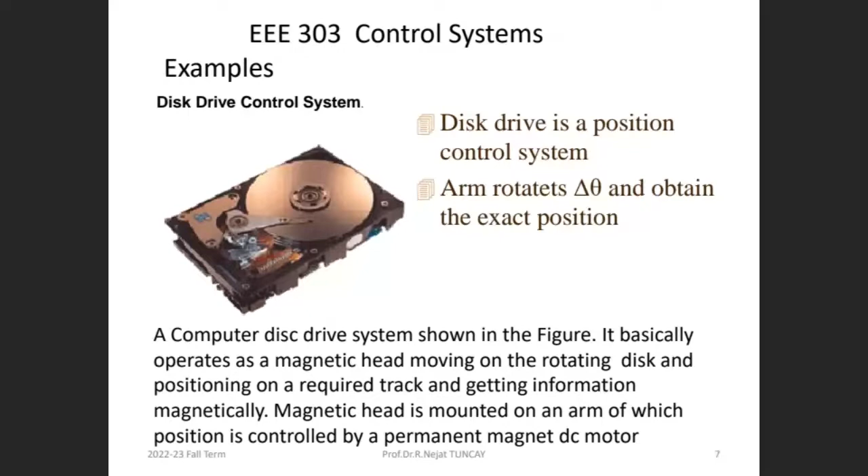So that was also another good example of the control system. For that case, it's a position control. Theta angle is controlled, so rotation angle is controlled. That's the example we talked. That is translational motion, so linear motion, in other words, is another type of action, and control the position of it.

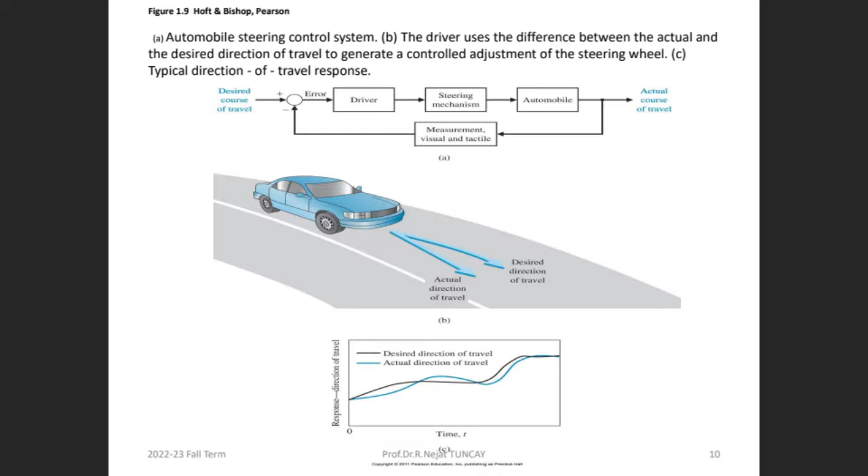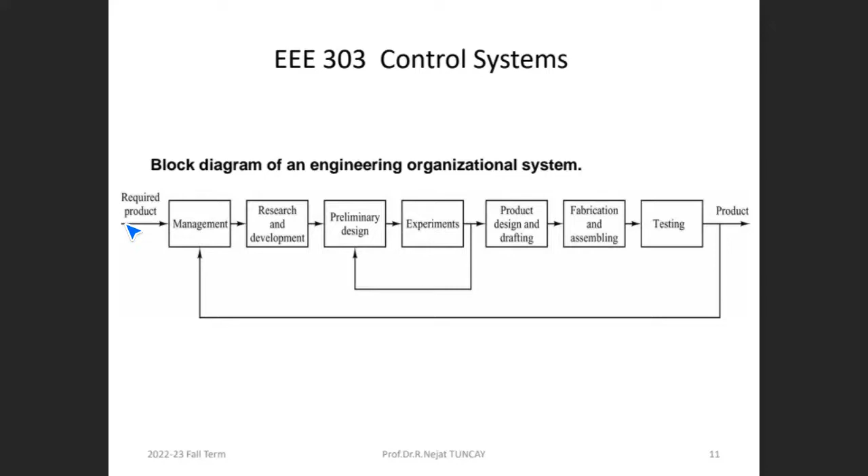Production system we discussed. That one is the first prototype in your lab. Then when you test those, you can see that there's a feedback here. And at the end, when you reach the product, you always compare it with the recent developments of the market demand. That is also another control problem. And we have also discussed the linear system and nonlinear systems.

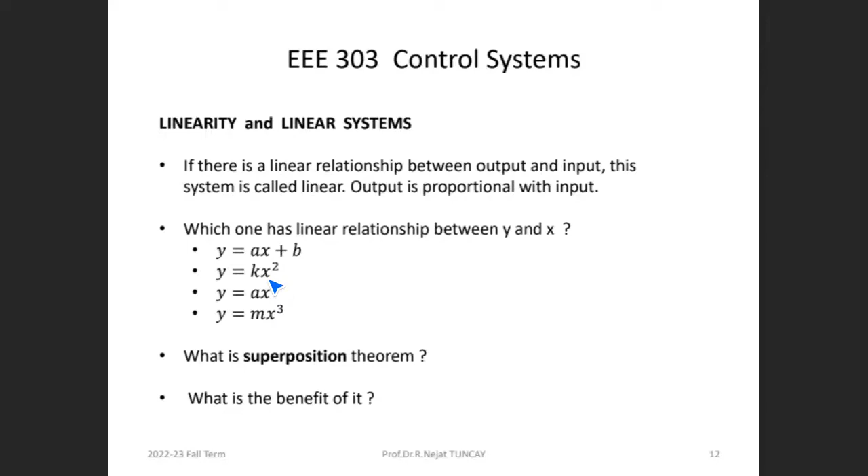We have seen that mathematically, the function which crosses zero with a constant slope, can you see that, is linear. That is a line, however it is not mathematically linear, since it's not crossing zero, okay? Although that one is crossing zero, it is nonlinear. And also that one is crossing zero, but it is nonlinear. Okay, so crossing zero is not enough, but necessary.

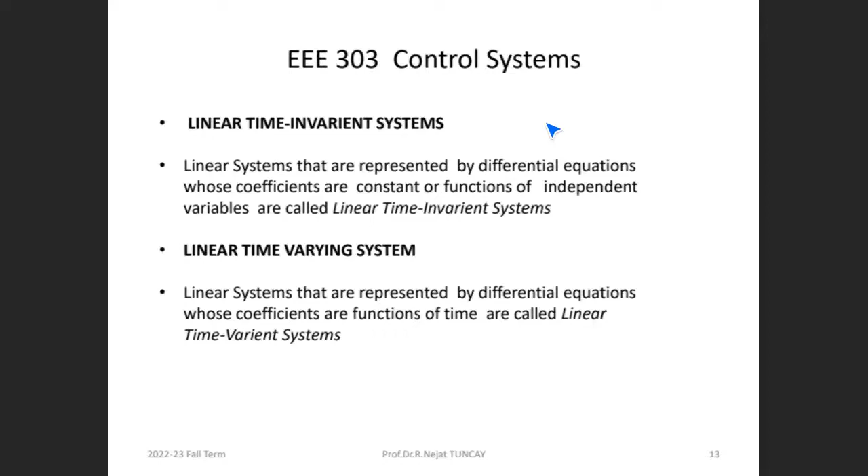Okay, and also linear time invariant. What is linear time invariant all about? What is linear time varying all about? I'm going to explain it to you. Okay, I will come back to linear time variant and time invariant systems later.

Bu önemli çocuklar. That's important. We have several types of inputs to our control system. One of them is a step. So you are actually producing a force which continues. However, if you give a pulse at an instant, that is an impulse function. That is not shown here. However, if your

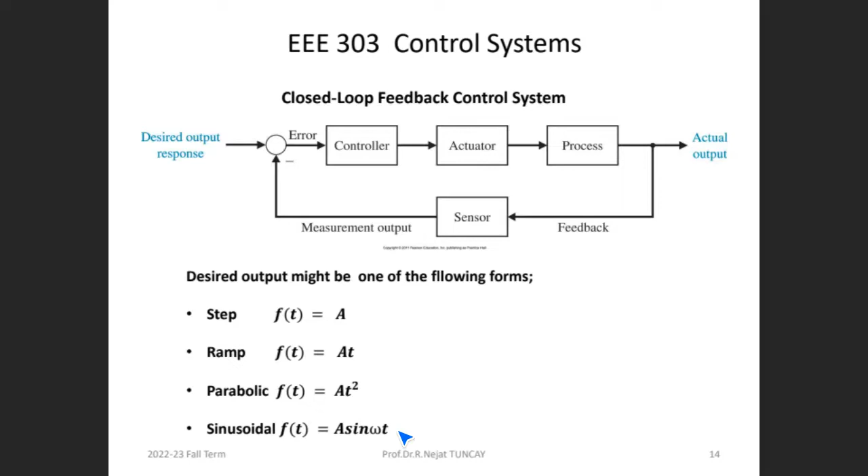force has got a slope with constant a and is a linear line, then it's a ramp function. Parabolic function is the square of this one, time, and also the sinusoidal function. Particularly you electric and mechatronics students might be able to see the sinusoidal response of your systems. So this is just revision of last week.

Inner loop, outer loop. There are two methods, transfer function approach and state space approach. We are going to use the transfer function approach. The transfer function approach uses S domain calculations. What's the practical point of the S domain?

We have only 6 students in our classroom. That means these students are keen to listen to the course early in the morning. They don't want to lose the time, or they don't want to lose some kind of teaching material.

So I hope you are going to answer this question. What is the benefit of S domain, or Laplace converted forms of the equations? What's the benefit? If you don't answer this question, that means you allow us to use Laplace to solve our problem. All right, but what is the benefit? Adil Bayraktar is saying that it helps us solve the problem. All right, how?

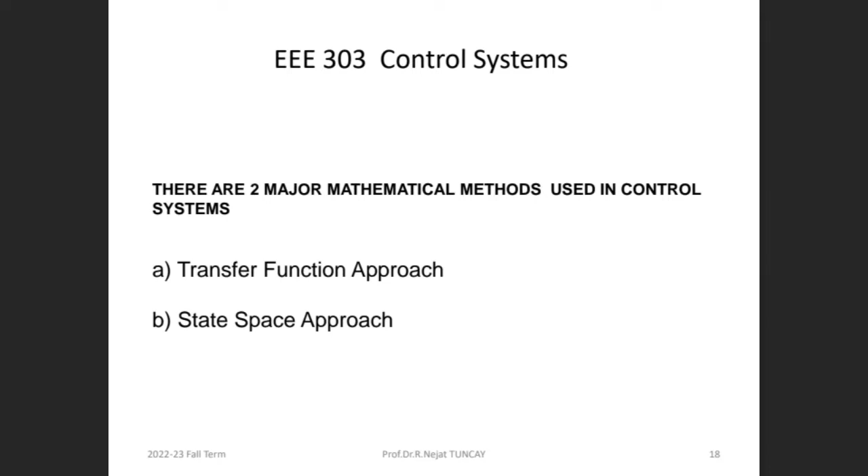Evet. To find the input, then doing the inverse. No, first of all, you couldn't catch my question. What is the benefit? Benefit means what's the advantage? The advantage: if you have derivatives in your differential equation, you convert it to Laplace and make it a linear algebraic equation, no derivatives. Then, of course, you are going to come back to time domain. S domain is the tool we use. Okay.

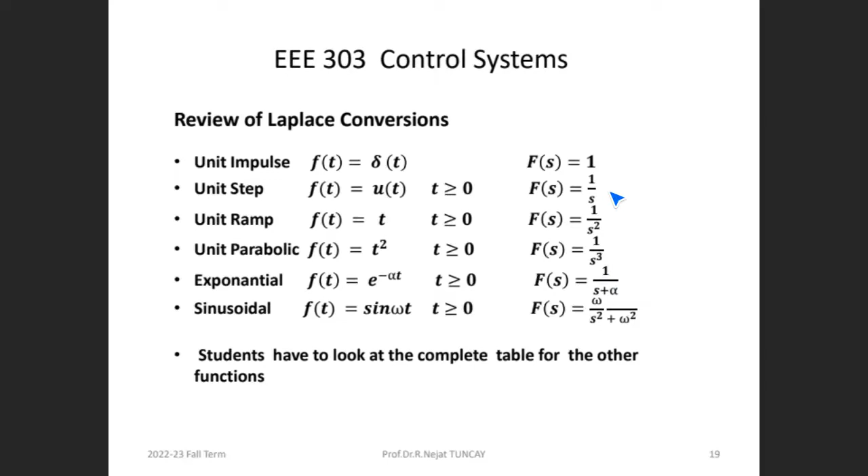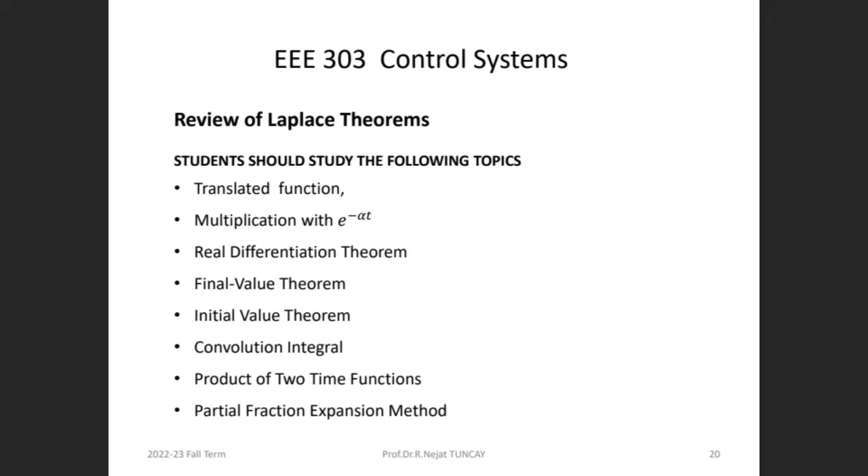All right. Final value theorem. The limit as time goes to infinity of the error is equal to the limit as s goes to 0 of s E(s). So in order to find the final value, which means ESS, the steady state value of the error. What's error? You remember that.

This is your control system. This is your input, R. This is your reality. And this one is plus, this one is minus. There's a system here, and that is the output. See, these are time functions, by the way. That is what a control system is all about. So that one is plus, that one is minus. So that one is E, error. E is error.

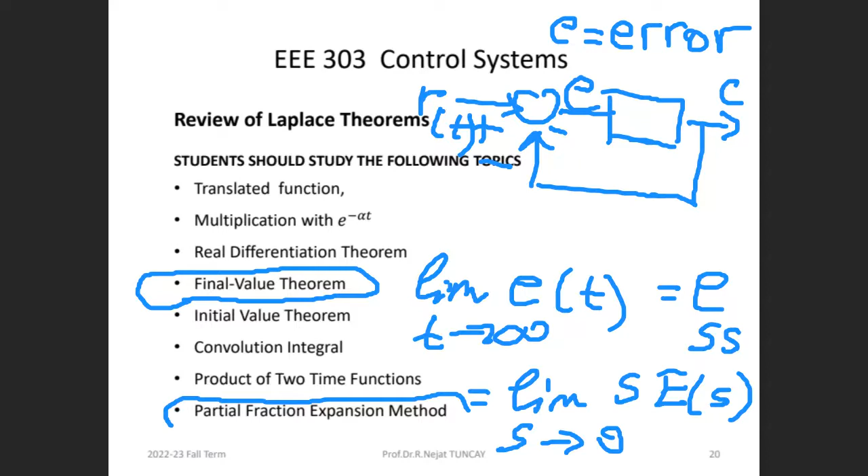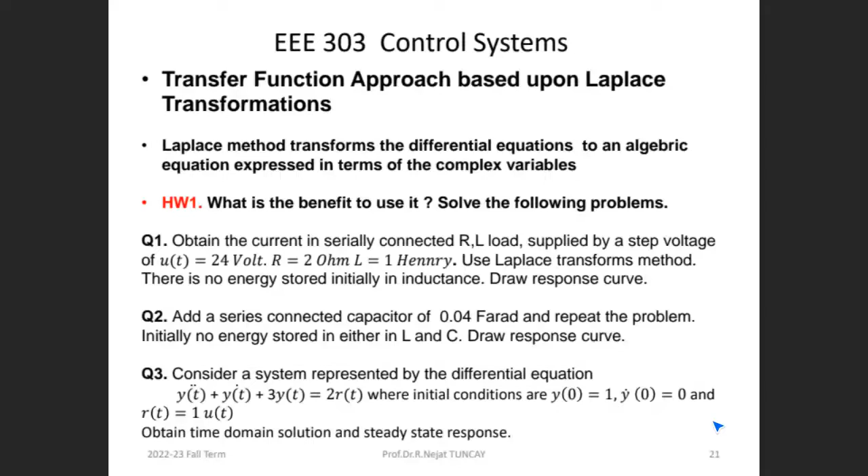I prepared those questions for you. It's not official homework, but you have to solve those. I'm going to solve this simple one later. So when you solve those and obtain the response, that means you start understanding at least the mathematics of it. So that's the end of last week.

You remember the superposition theorem we have discussed. If you have multiple inputs and the system is linear, then you can employ the superposition theorem. The superposition theorem tells you to solve it as if each input exists individually and the others equal 0.

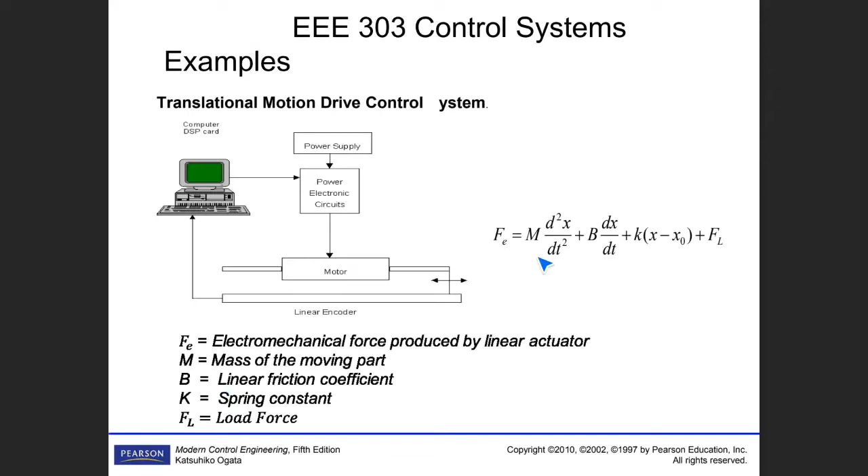I come back again. So you can see the rotary system is clearly similar. And for that one, that is mass. And also this is the friction coefficient. This is the spring constant, elasticity constant, and the load force. The electromechanical force is the one produced by the electric motor. The electric motor produces that force and overcomes all of them. Since there is a balance here, this part is the dynamics of the equation, and that might be steady state.

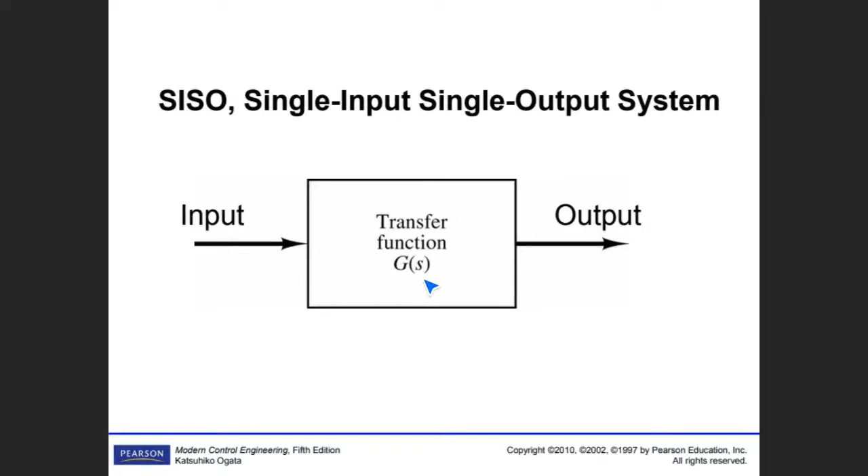Now, we are coming back to simple definitions. Single input, single output system. We have one input, one output. All right. And this you might call gain, or, if it's complex, a transfer function as well.

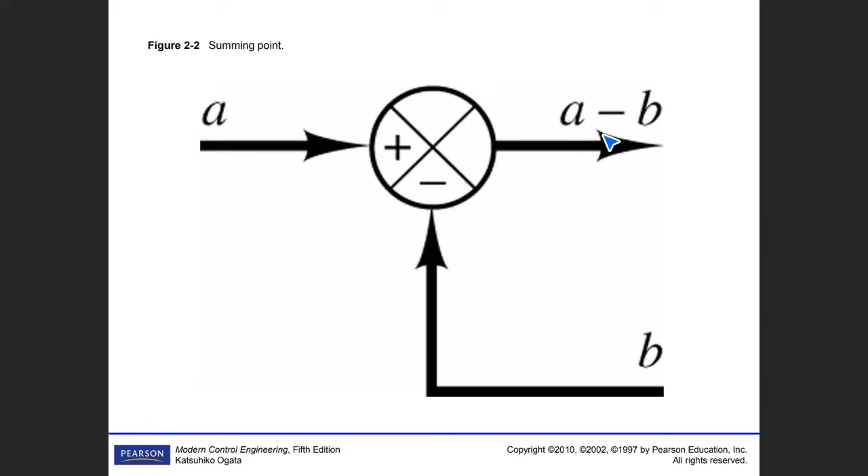What's that one? It is the comparison. We have already discussed that one. A is the value, most likely your wish. B is the reality, and this is A minus B. That is the definition. RS is your input. CS is your output. Some books use YS. Sometimes we use that one as well.

Generally, we use C(s). However, since Ogata uses C(s), other books use Y(s). So if you see output Y(s), don't be surprised. Transfer function is C(s) over R(s). This one is important, which is error. Error means how far you are from reaching your objective.

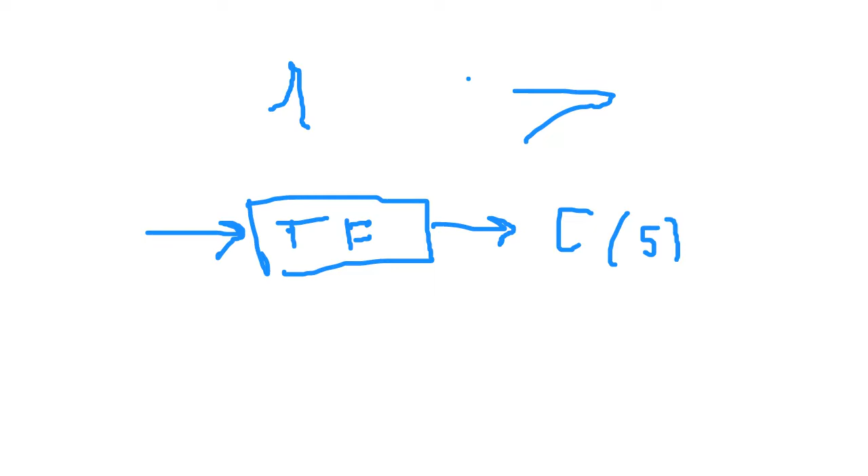Yes, I solved the problem. That system becomes like this. TF, transfer function, output C(s). As long as you solve your control problem, you have R(s) input, and your transfer function here is equal to...

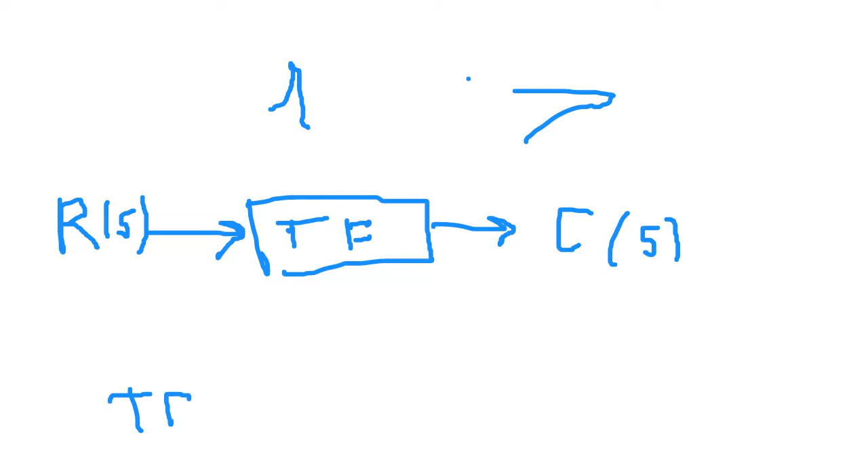TF is equal to G over 1 plus GH. You are going to derive it. If you cannot do it, I'll do it next week, okay? So you have to derive that equation. As long as you have a transfer function like this, it becomes like this. So obtaining the transfer function is important for you in order to find the relationship between output and input.

So your output then... yes, I'm listening. Mahmut, I'm listening. Okay. I listen, Mahmut.

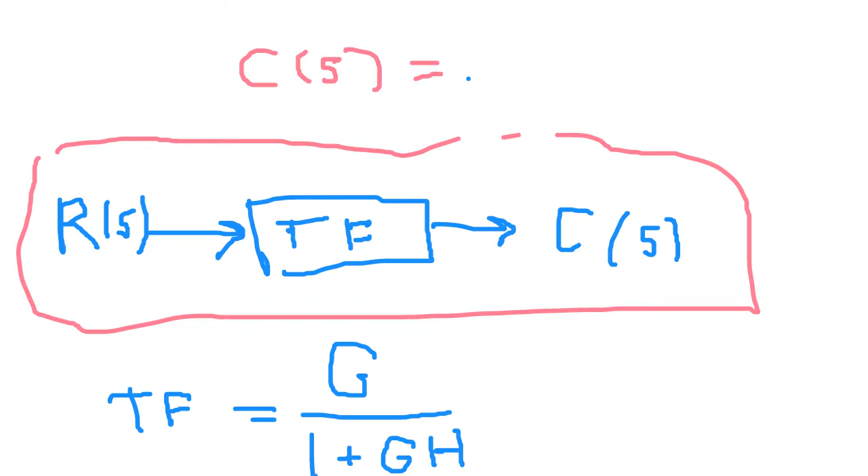So C(s) here, then you can calculate C(s). C(s) is equal to TF, transfer function, times R(s). Okay. So calculation of the transfer function is very important, since it's going to easily give you the output value. I come back to the original slide.

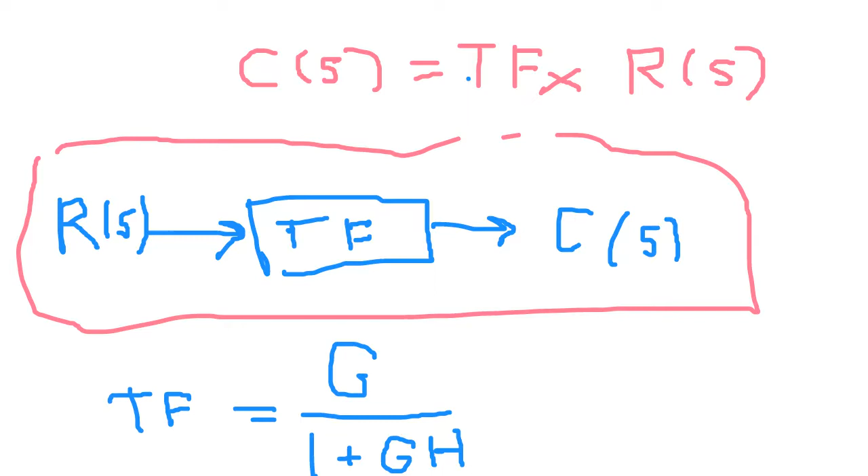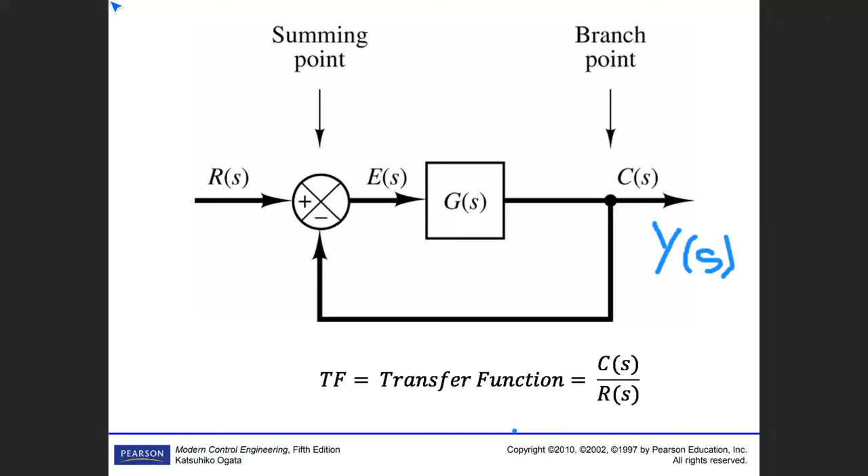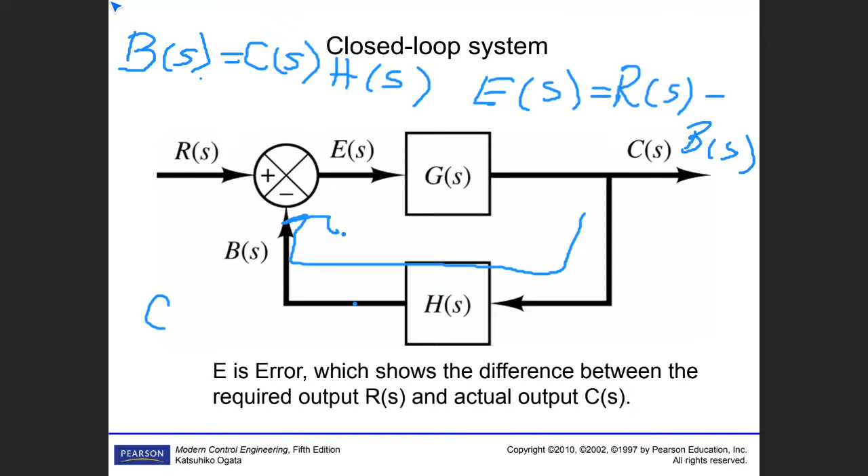As I told you, there are mechanical equations, either rotational or translational, and this is input-output, single input, single output, and this is the output-input relationship, the transfer function. And then what is B(s)? B(s) is equal to C(s) times H(s). So E(s) is equal to R(s) minus B(s). If you continue like this, you can obtain the transfer function. Derive it yourself.

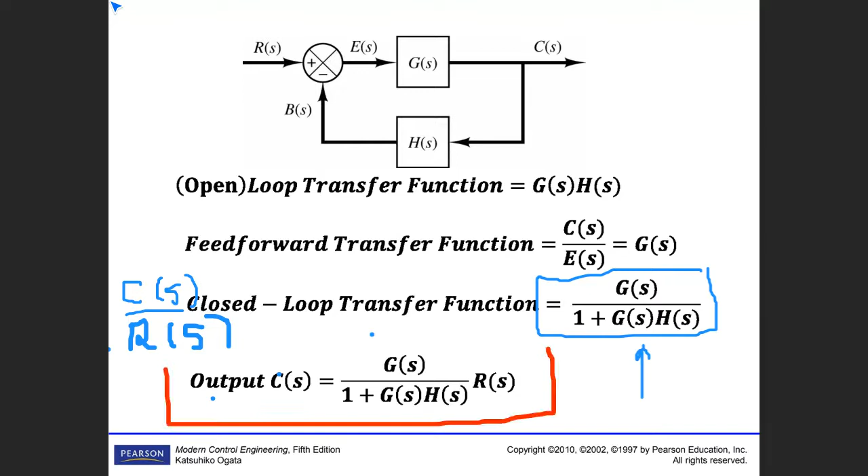Try to do it. For the closed loop system, C(s) over R(s) is your transfer function. Therefore, the output is equal to this one: transfer function times R(s) is going to be the output, C(s).

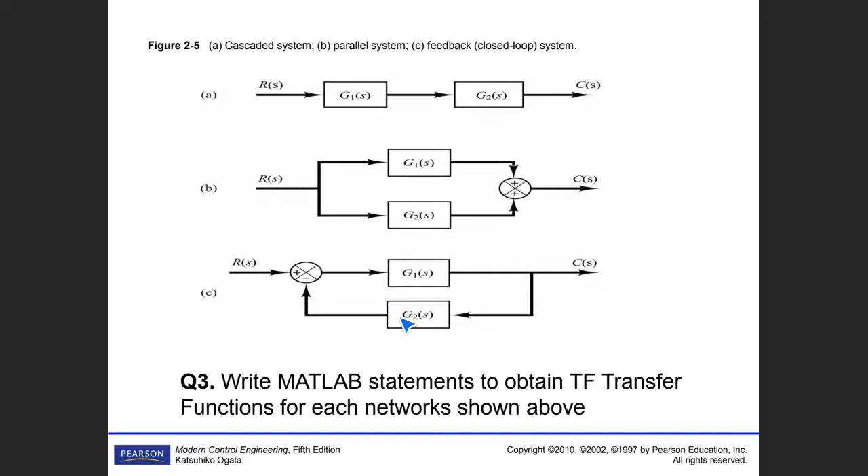So if you look at this, this is the product, G1 G2. This is G1 plus G2. This one is obvious, G1 over 1 plus G1 G2, transfer function, closed loop, okay? This is, I mentioned that one. If you have two loops like this, one is called inner loop, the other one is outer loop.

What are you going to do? You are going to first solve this inner loop, get the transfer function of this one, get rid of that loop, then you solve the outer loop. Okay, don't forget that. Now that is very important part of your design.

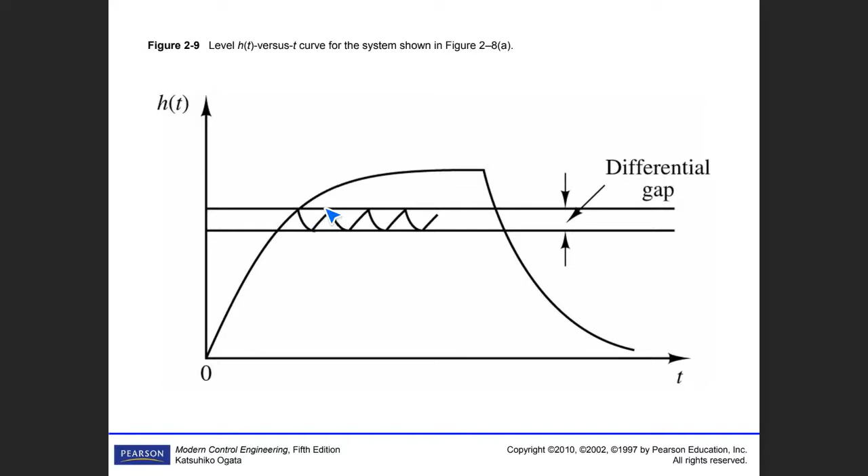But when it reaches here, the heating system turns off, and the room gradually cools down, and when it reaches the minimum level, it turns on again. As long as it's on, the temperature goes up. As long as it's off, the temperature goes down. Okay, this is a typical on-off controller system, and this is the differential gap between those. That is not very comfortable.

For example, there's a homework. In order to keep the load current constant in a series-connected RL load, which is supplied by a DC source battery, on-off control is used through a semiconductor switch, MOSFET or IGBT. Draw the circuit model and derive the equations to keep the current between Imax and Imin.

Çözeyim size bunu. Gerçi güç elektroniği dersinde you are going to learn it properly, but I'm going to solve it. Yeah, these are the controllers.

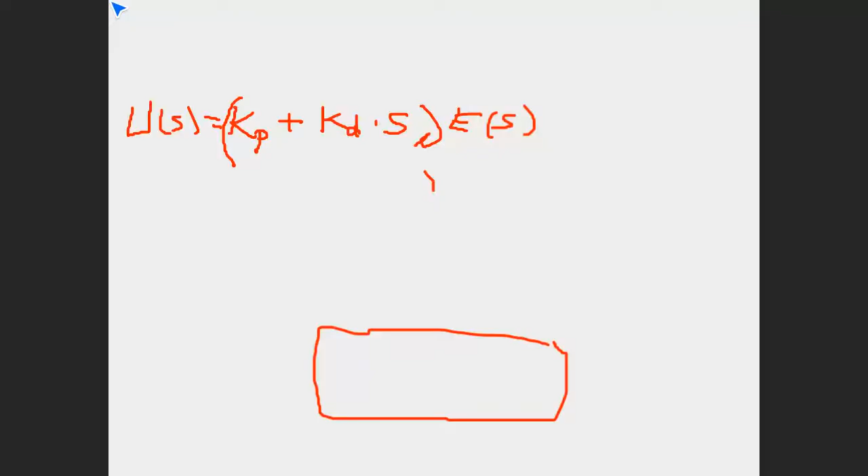When you put those together, you are going to solve the system. You are going to obtain this one, KP bracket 1 plus 1 over TI S plus TD S. Then, of course, if you multiply both sides by TI S, you obtain KP times 1 plus TI S plus TI TD S squared, over TI S. I will enlarge this a bit.

That one is worth discussing. If you have a PID controller, what is your controller actually doing? Probably you may not answer this question at first. So I come back and start from the single ones. What your controller is doing here is just multiplying with a constant, so amplifying it.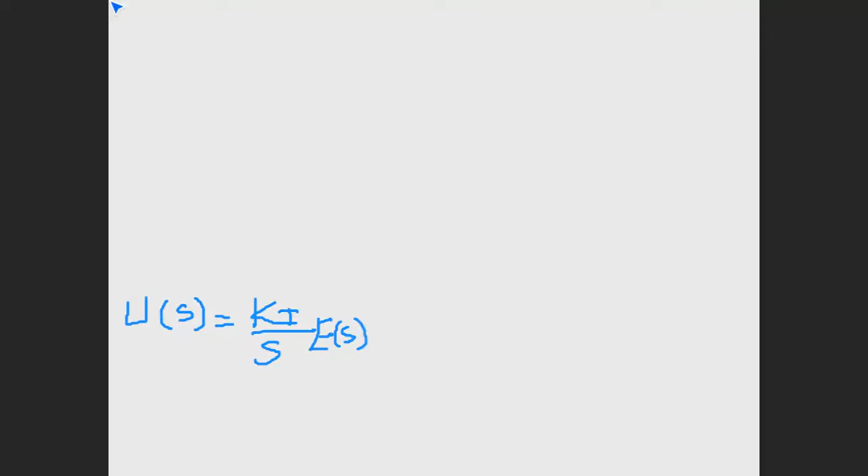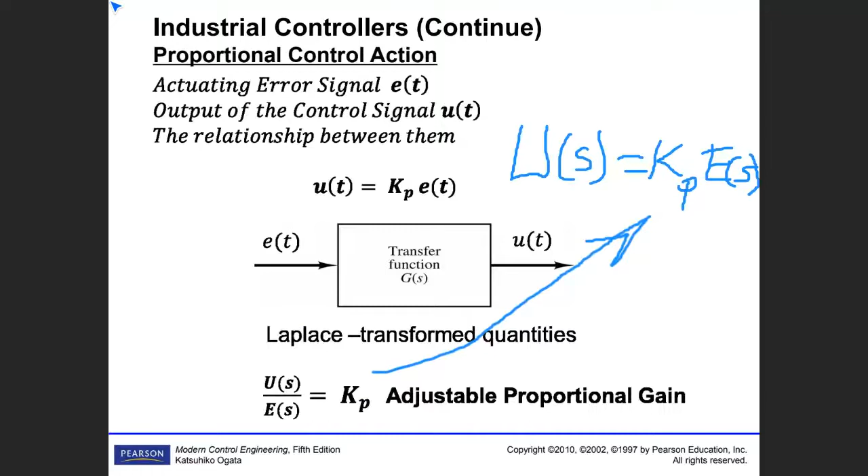Now you can interpret that one. This is the transfer function of your controller. What kind of transfer function is this? Follow me carefully, this is going to open up your mind immediately. This is the controller, this is the one here. Your controller is something like this equation. Your controller is that type.

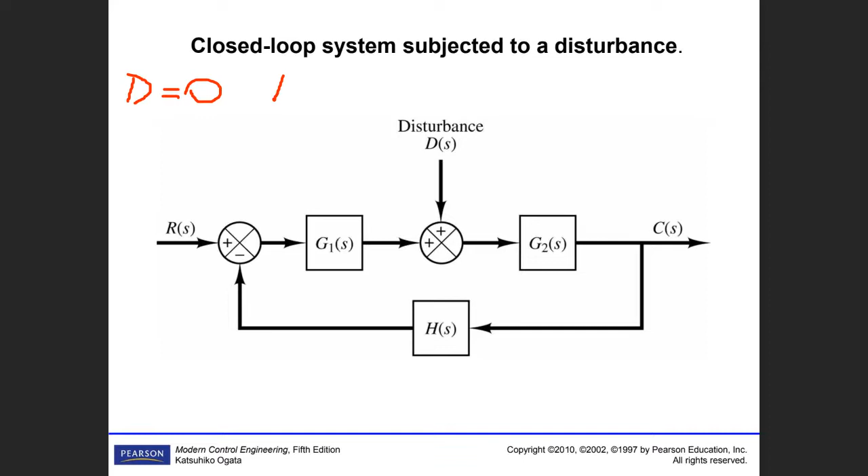Transfer function of this one for only R(s), D is equal to 0. So transfer function is this one, TF for R is equal to G1 G2 over 1 plus G1 G2 H. Do you agree with me? G1 G2, there is no disturbance. 1 plus G1 G2 H.

For disturbance only, if you have a disturbance only, I'm going to show it in blue color. There is no R(s). This is the input. So that is the output. And this one is the feedback line. Feedback line here.

So that means if I write the equation here, G2 over 1 plus G2, then H, then G1, is equal to transfer function D. So for blue case, we assume that we only have D, but we haven't got input. And for the red one, in that case we haven't got D, and we obtain transfer function.

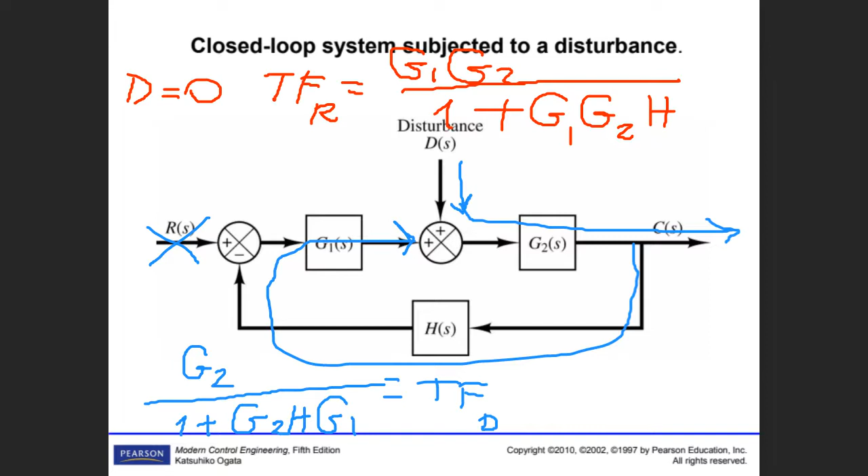So if I come back here, I already obtained those transfer functions. C_R(s) over R(s) is equal to, as I derive those equations, G1 G2 over 1 plus G1 G2 H. C_D(s) over D(s) is equal G2 over 1 plus G1 G2 H. One thing is interesting. We need to find the final solution. C(s), the output, is equal C_R(s) plus C_D(s). C_R(s) is equal to this. You have to multiply with R(s). C_D(s), you have to multiply with D(s).

So at the end, we obtain C(s) is equal G2(s) over 1 plus G1 G2 H, bracket G1(s) times R(s) plus D(s).

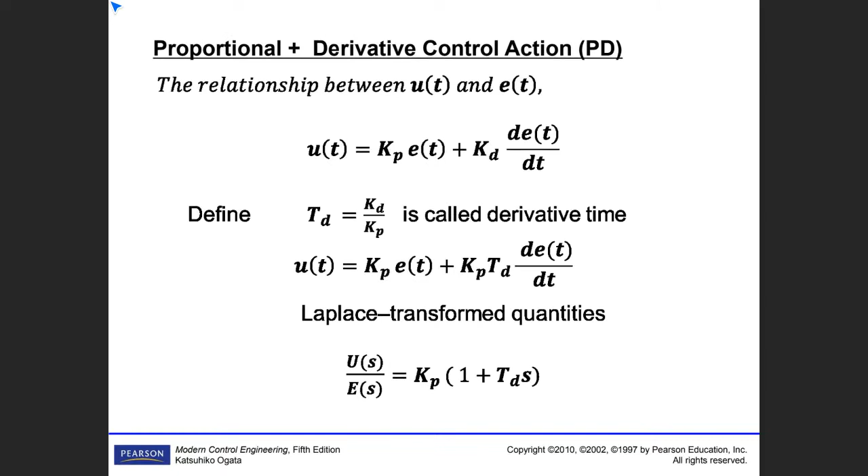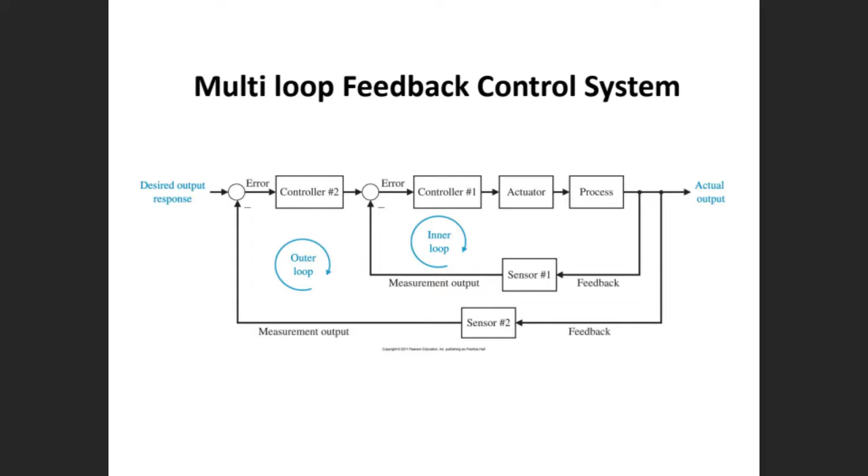That is generally, it was very popular in the past to make reduction in the calculation of, or solving, the block diagrams which are rather complex. If I come back to multi-loop, you remember that I said first you have to solve this loop, then the second loop comes. But sometimes, as it is in the problem I'm going to show you, you have to get rid of those loops.

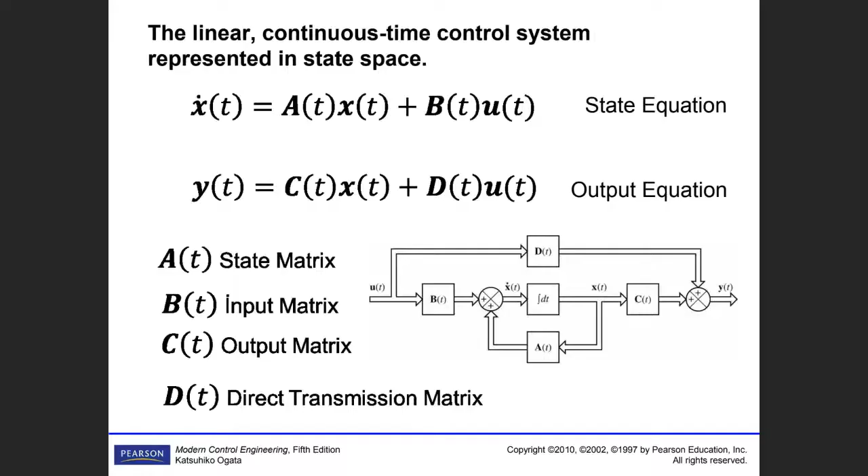The state space method is a completely different approach. It is a time domain equation, and the state of the system is a set of variables such that knowledge of these variables and the input functions will, with the equation describing the dynamics, provide the future state, and these are called state variables. Some advanced control problems are solved with the state space method, but first of all, you have to understand it as a normal domain system. I'm not going to get into state space systems right now.

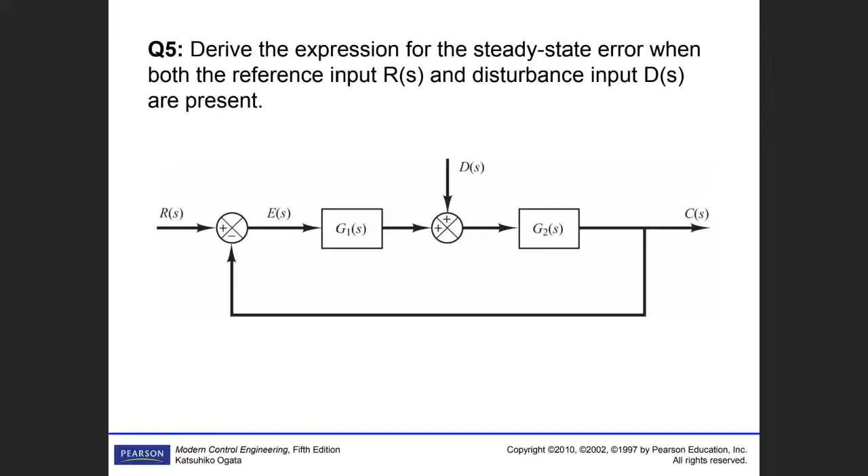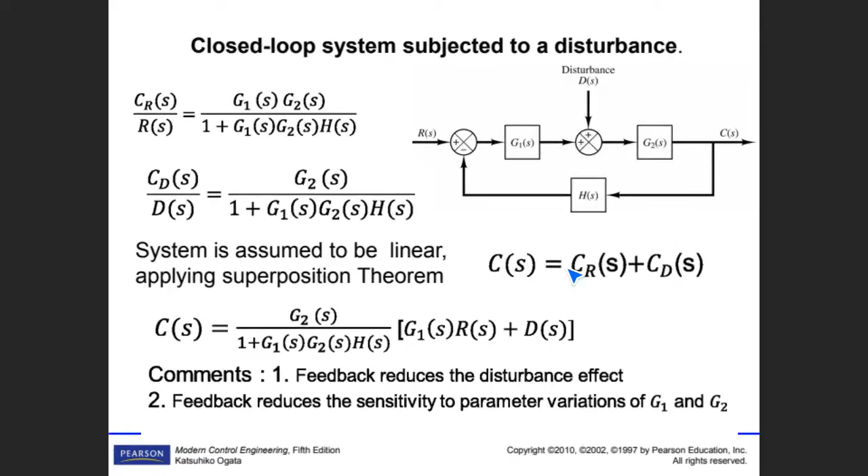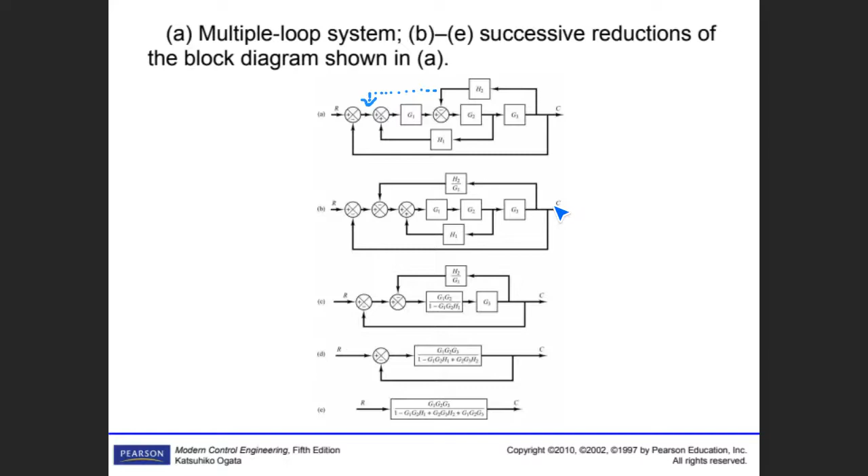What we have learned today is the application of the superposition theorem to multiple input control systems to reduce the complex feedback systems, to reduce the level of it. We already have done that. And also we have learned what a proportional controller is all about, what an integral controller is all about, what a derivative controller is all about, and what a PID, proportional, integral, and derivative controller is all about. That means by adding a controller to your control system, you are actually adding 2 zeros and 1 pole to this system.

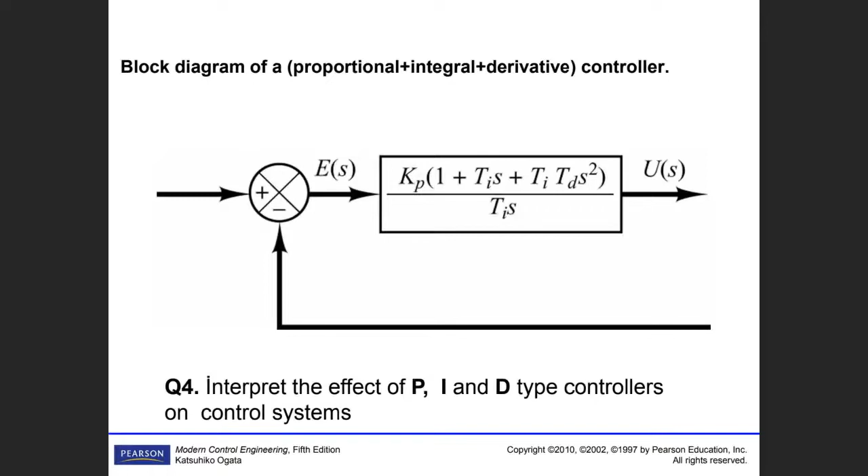So I go back and look at what we have done so far. On-off control is of course widely used, but not very good, not comfortable. For example, in your room, you would like your room temperature to be 22, okay? But you fix it at maximum level 23, minimum level 21. So when it warms up and reaches 23, you feel it's hot. Then the switch turns off and the temperature gradually reduces. Of course, it reduces to 22 as well, but then further reduction until 21.

When it reaches 21, you feel, oh, that's bad, I feel cold. You feel hot, you feel cold, and of course that is not a very comfortable control system, or not very accurate actually. So controlling the temperature between 23 and 21. If you reduce the maximum and minimum limits, then it's going to be turning on, turning off, turning on, turning off. So the switching frequency is going to be increased. That's why the on-off controller is cheap and widely used. However, it's not comfortable. It's not very accurate either.

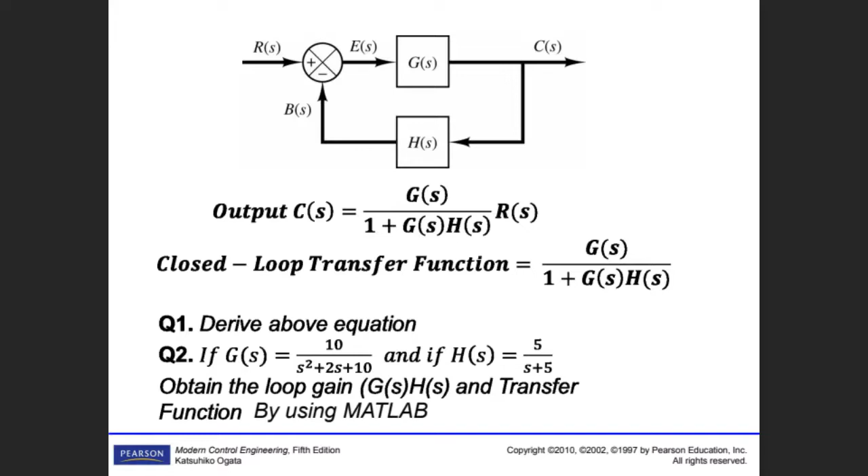Okay, now everyone has MATLAB. Did you install it? It doesn't matter, just download the last one. It's okay, 2018, 19, 20. All versions are okay. So let's run our MATLAB.

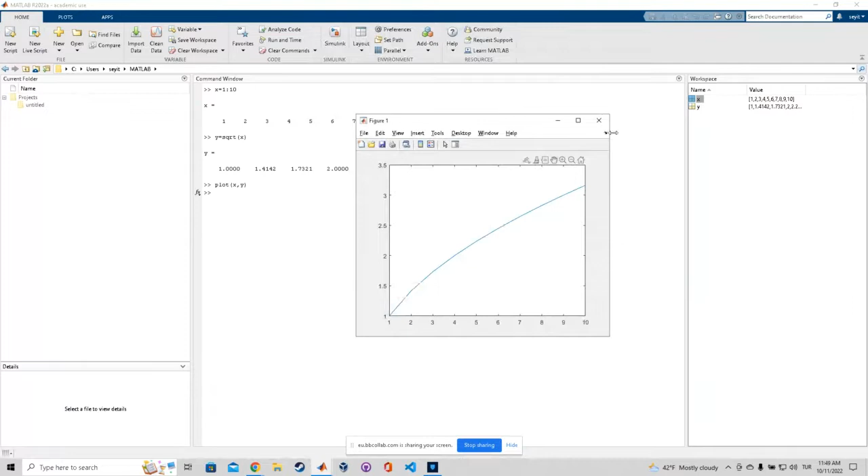And then let's say y equals the square root of x. SQRT, open parentheses, write x, hit enter, and it will give you the square root of x. Then you can plot these variables. You can write plot, open parentheses, x comma y. Just hit enter, and you get the plot of x and y. And then you close it.

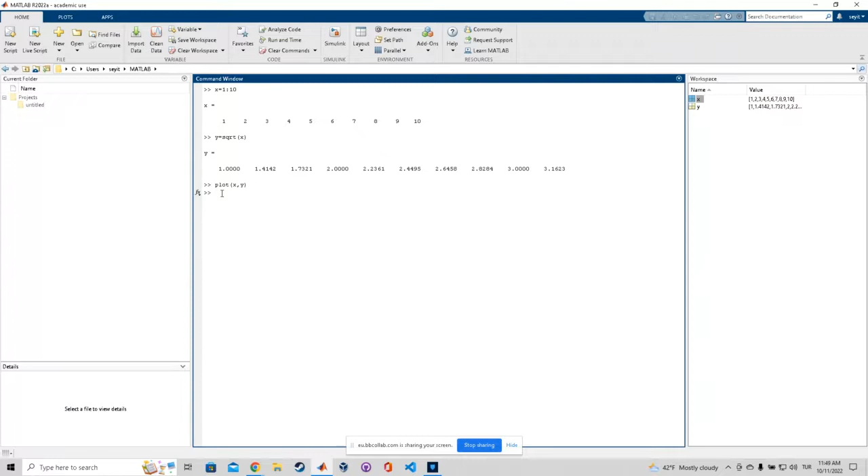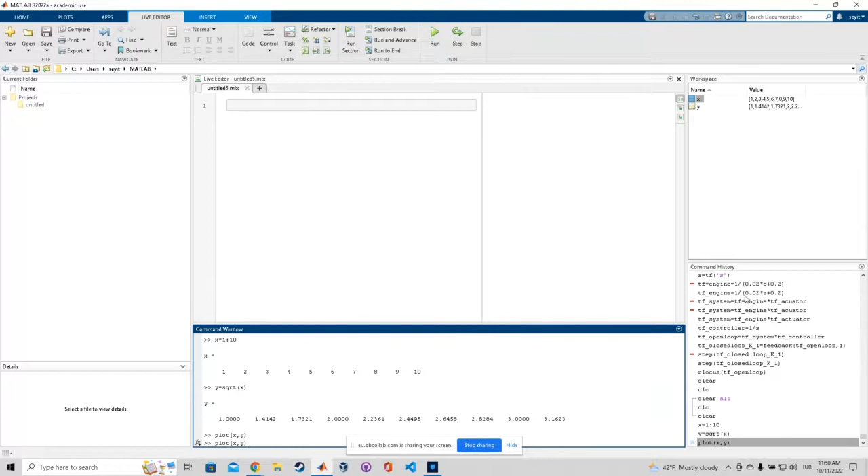Let's say you want to execute a lot of commands multiple times. For this, we're going to use a live script. You can hit New and Live Script. In a live script, you can write your code line by line without executing it. And also you can come to the command window, hit the up arrow, click the dock, and you can see your command history here.

Let's say we executed x and y, we gave them variables. Then you can press Control and choose these ones. Then right-click and copy, or you can just right-click and create live script. It will transfer it to the live script. Not this one. See, you can take it from history to your live script, and then keep writing it here. But you need to add parentheses here. It's not like the command window. Then you can hit run.

Hold up, someone has lost it. All right, let's repeat it again. You came here, right? On your command window, you hit the up arrow, okay? Up arrow.

And there is a command window. Let's say, where is it? You press the up arrow, and there's a history, right? History of commands. You press this arrow and choose dock, and it's separated on the right downside, all right?

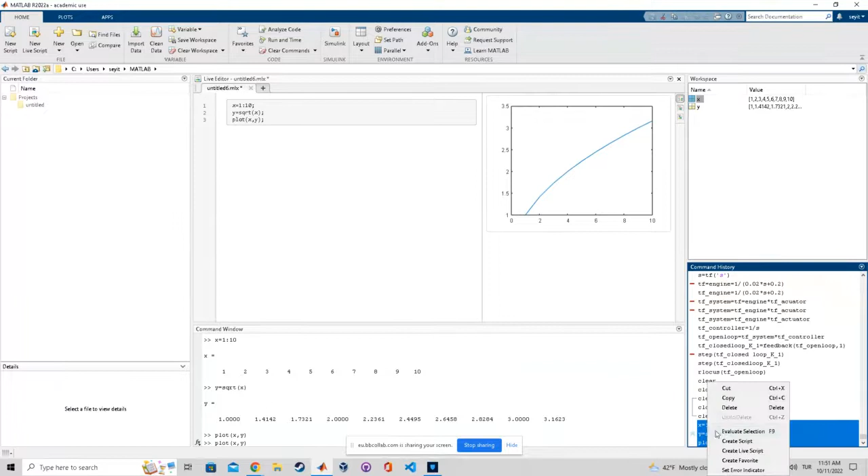And then you can press Control and choose these commands that you want to transfer to the live editor, then right-click and create live script, right? You just transfer the codes that you write in the command window to the live script. And then here you need to add a semicolon at the end of them because it will not execute one by one. So like this one.

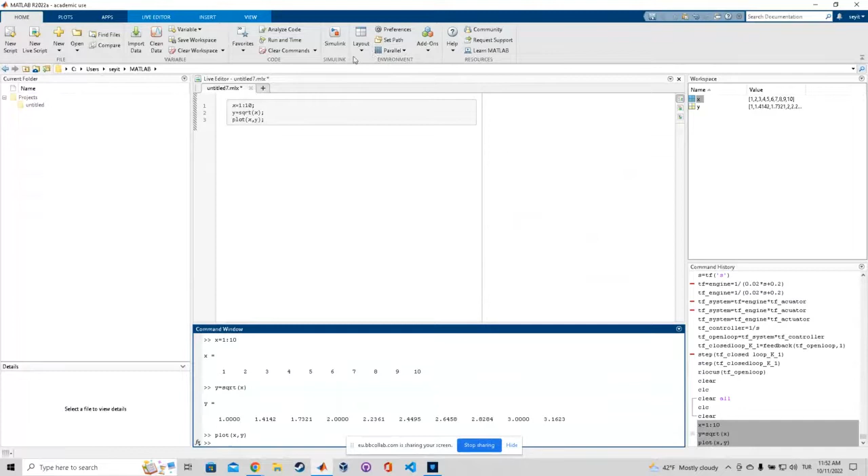Dock command just separates it to another window, you know. You separate the command window to here. You can see your command history. If you want to go back to default, there's a layout from the home section. You can press default here. It will just go back to the default settings, you know. It's okay. The dock doesn't matter right now.

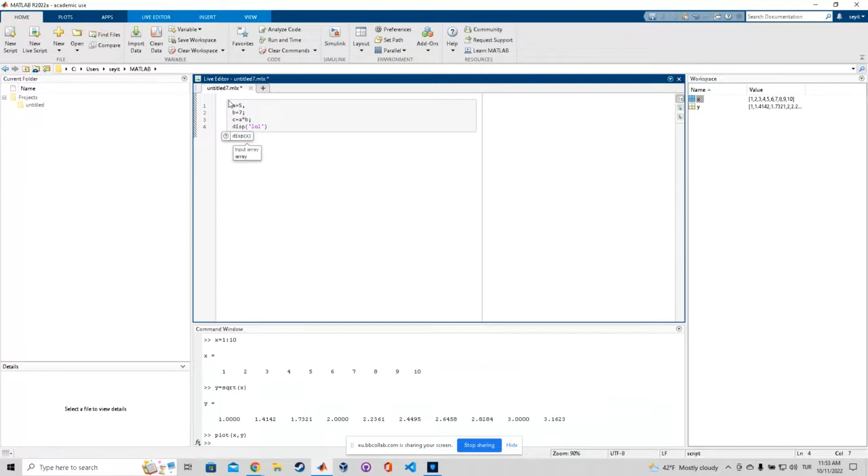Let's say we just want to create something else. You can write a equals 5, b equals 7, and then you can create c equals a times b, or you can display, let's say, whatever you want, lol, but you need to add this semicolon here. Then you can go to the live editor and run it.

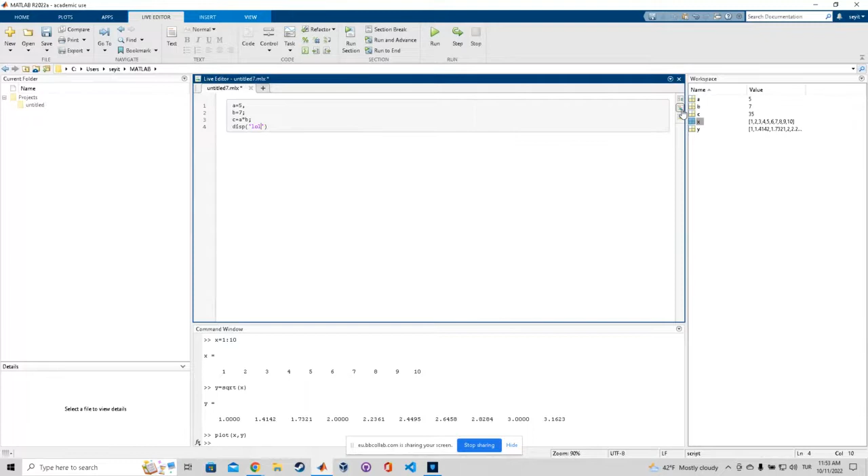You see your variables are defined in the workspace on the right side, right? And when you hit display after the execution of the codes, it will display the message that you write here, right? It says lol, doesn't matter. You can change the view of the live script. Your answers can be under the line of the code, or on the side, or you can see only the results.

See, can you hear me now? Can you hear me, guys? Yes. Yeah, it's okay. So fast. Okay, let's slow down. Write something. I cannot hear you. You're not giving any reaction, so I have to go normally. No, guys, you can open your microphone and talk to me. I'm on the application side, so you can open your mic and talk to me right now. Yeah, please go slower. Okay, let's slow down.

Now you can write a variable here and display a message after it in a live script. Let's say here we have comments, you know, with a percentage sign, right? With this percentage, you can explain your code. Type a percent and start typing, right? Let's say this one explains the code, what are you doing in this code. It's a comment, all right?

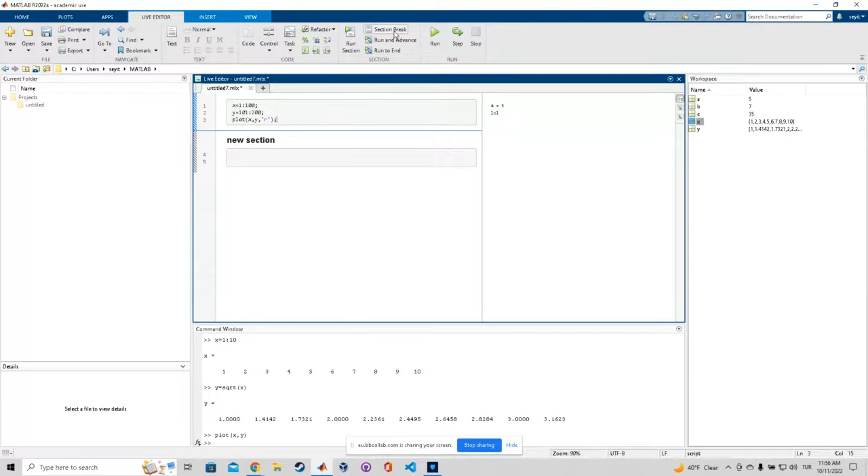Let's say what are we doing? X equals from 1 to 100. Y equals from 101 to 200, let's say. Then plot x, y. After you write your code, you can hit run section here. It will only execute this section, it's not going to execute the other section, all right? And you can see your result on the right side.

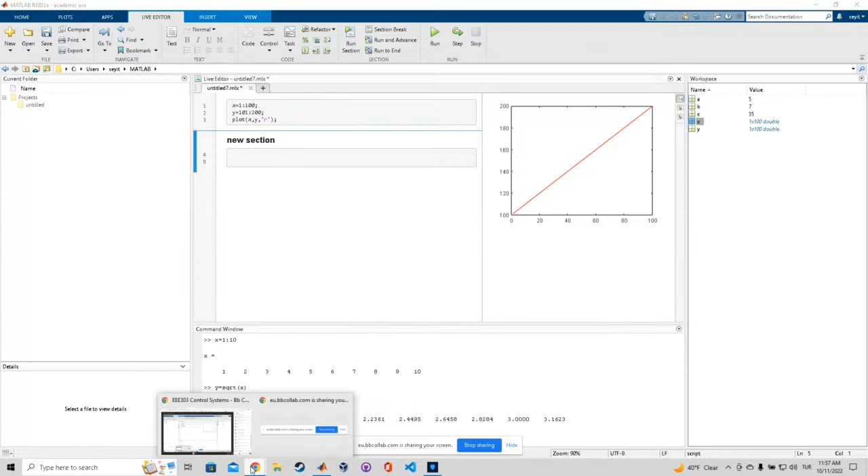Everyone okay till now? So far so good? Guys, are you here? Yes, right. You can answer with your microphone too. Don't forget.

And then we have indexing. We use indexing to take a subset of a vector or matrix. Let's say here, our x variable or y variable. The fifth element of y, we see here, is 105, right? From the command window, you can type y(5), the fifth element of y. Hit enter, it will give you the answer: 105.

Or you can, like, say the eighth element of the y. What is it? It's 108. See, it's 108, right? And then you can assign a variable to this one. Let's say we have v equals the fifth element of y, right? And then here in the workspace, you see v equals 105, the fifth element of y.

What else? You can change the first five values of y to be 6 to 10. Let's say y from 1 to 5. We can change this variable. Let's say equals, you can open brackets, say 6, 7, 8, 9, 10. Hit enter, it will change it, right? You see the first from 1 to 5 are now 6, 7, 8, 9, 10. We can change the variable this way.

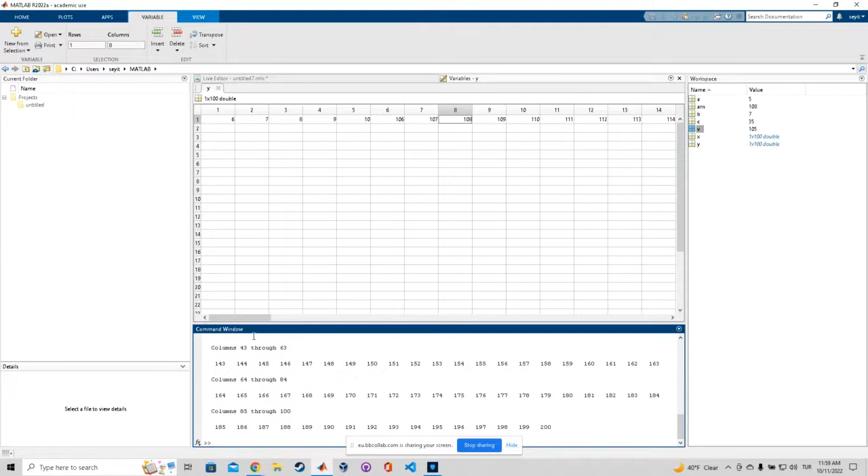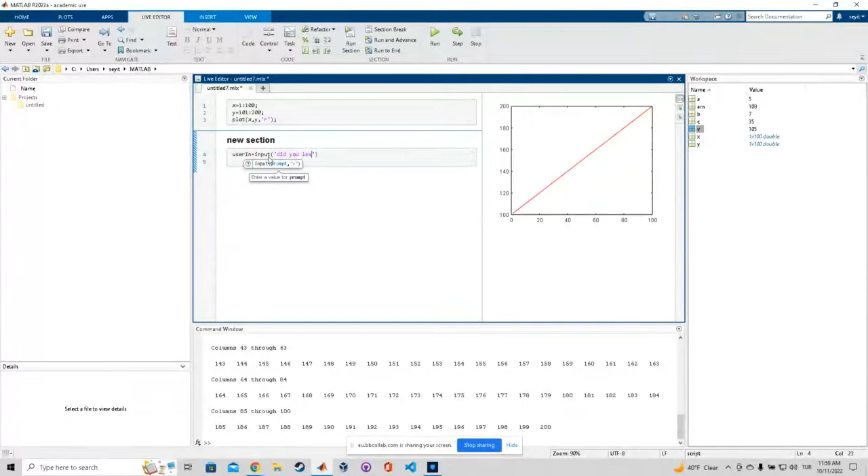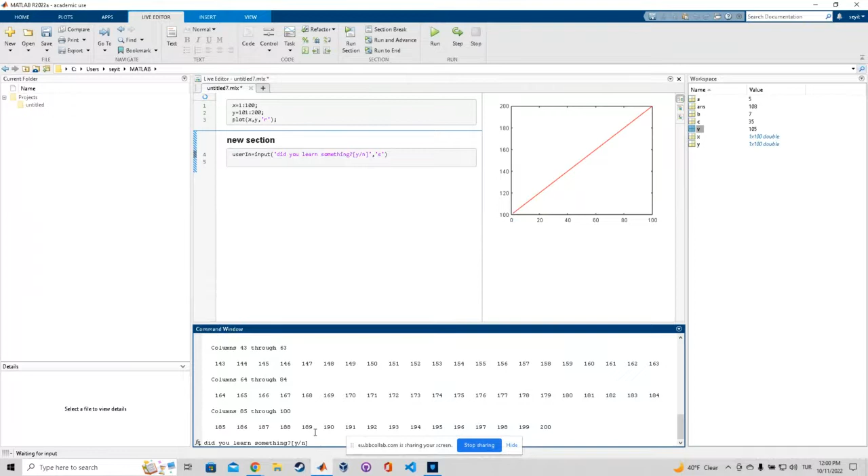And then let's go back to our live script. Then there's an if-else section. Let's say user input equals input. You can ask the user to input something, right? Let's say, did you learn something? Ask a question, yes or no, and put 's' for the string. When you write this and run the section, it will ask you, did you learn something? And you can press Y.

So under this one, let's define if the user input equals n. If the user inputs n to 'did you learn something?', we can display: oh man, you didn't learn anything. Or you can add the else section. If the user hits n, you can display this message.

Or else if they press something else, like user input equals, let's say, n, you can display a message again and say, please reread again. Give the message again here. And then you can add else, if the user inputs something else. For the else, you can add it.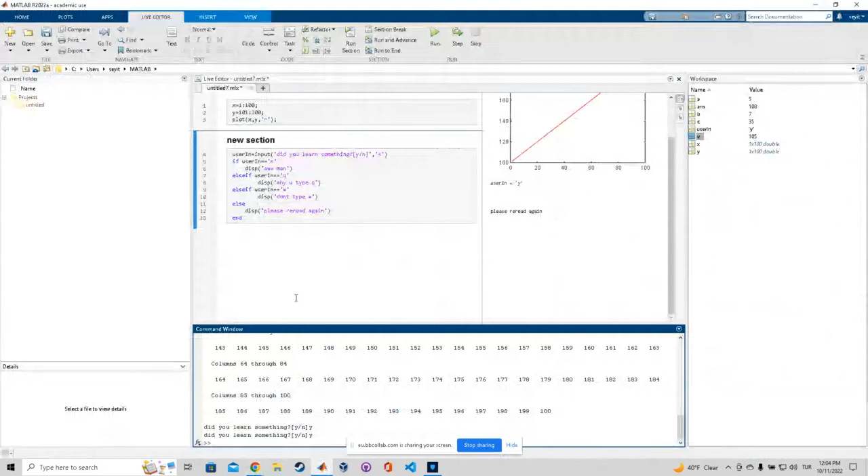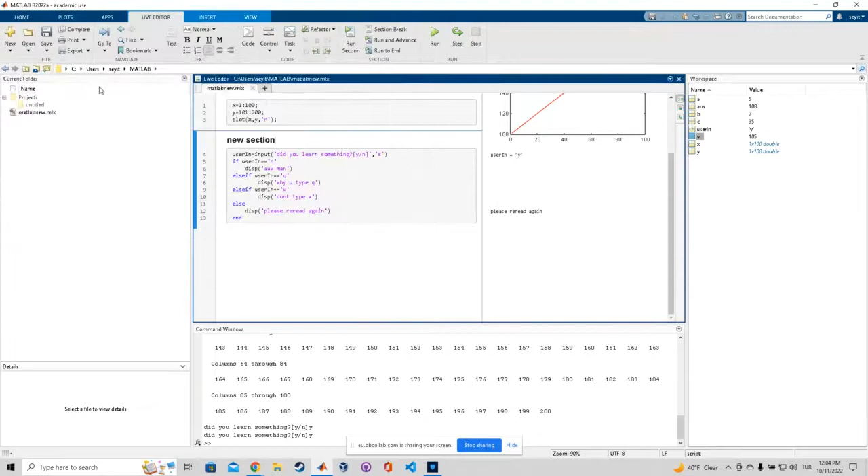You can save your file here. Come here, Save As, let's say matlabnew. You can save it here, and then you can see it on the left side in the current folder. And here in the command window, typing clear will clean your workspace, and CLC will clear your command window.

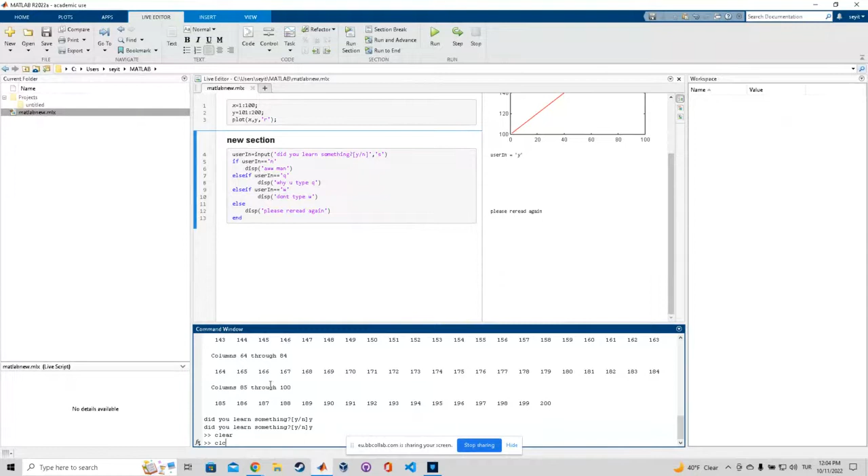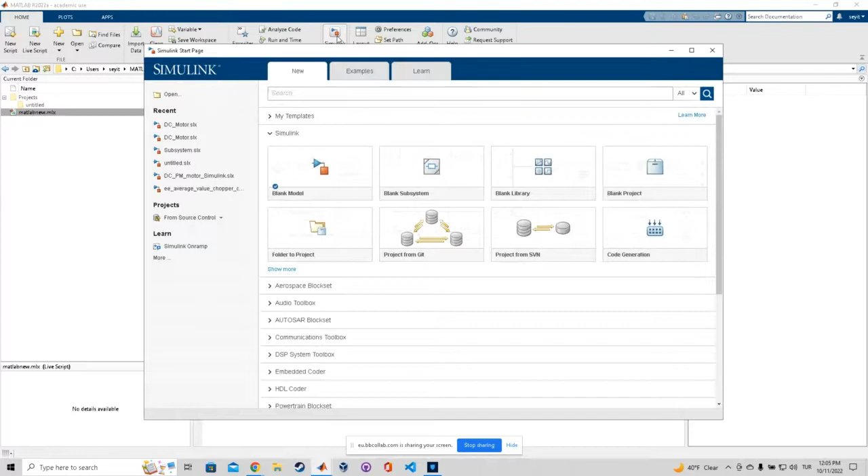Let's close this one and go back to Home. There are plots and apps, and in the apps section you can use a lot of apps, depending on your project. But the first important one here is Simulink. We're going to use Simulink in our lecture, so first you need to learn Simulink very well. Let's start Simulink. We're going to use a blank model. Hit create model, and here is our Simulink model.

We have our library browser here. We're going to choose the things we need from the library. In control systems we use transfer functions, right? Choose your transfer function. You can see discrete transfer function, zero-pole, and down here discrete time, discrete function with initial outputs or initial states. You can use one of them. So this is your transfer function.

When you double-click it, you can change the numerator and denominator. Say you change the numerator to 2, and the denominator, let's say 5s plus 2, so we change it to 5, 2 and apply it. Okay, save it. Then we need something else, since we're creating a loop. What do you need?

You also need a gain. Here is the gain. Choose gain and drag it onto the worksheet, and it will come up here. Then for the transfer functions, you need a sum to connect them to each other. Let's say we need another transfer function. Just Control C to copy it, paste it, and you get another one.

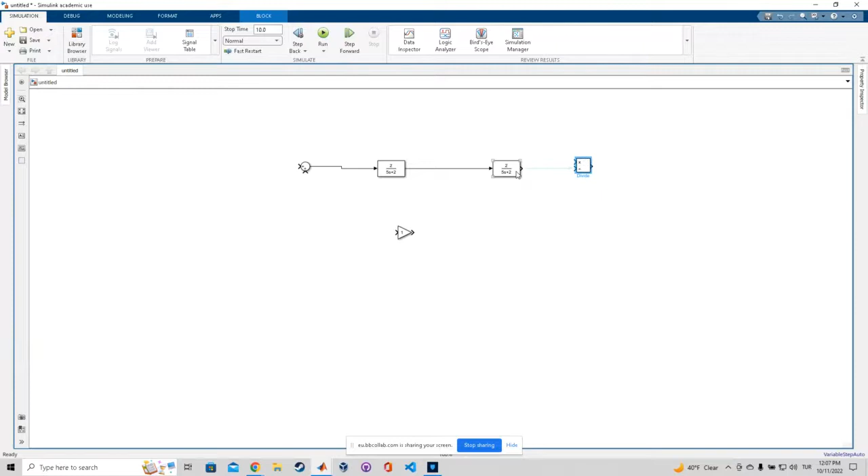Let's say we connect these two transfer functions here and add a divide. Say divide product, all right? We need divide, right? Let's say we connect this transfer function, you divide it, you connect it, and then you get your gain from here. So you get the gain from the output, and you want to connect it to the input here.

You can double click here, and then you can change it. It's going to be sum or deviation? You can change both to minus, all right, and then both will be deviation, and then you can change it to, let's say, one plus, one minus, all right. Here is your transfer function.

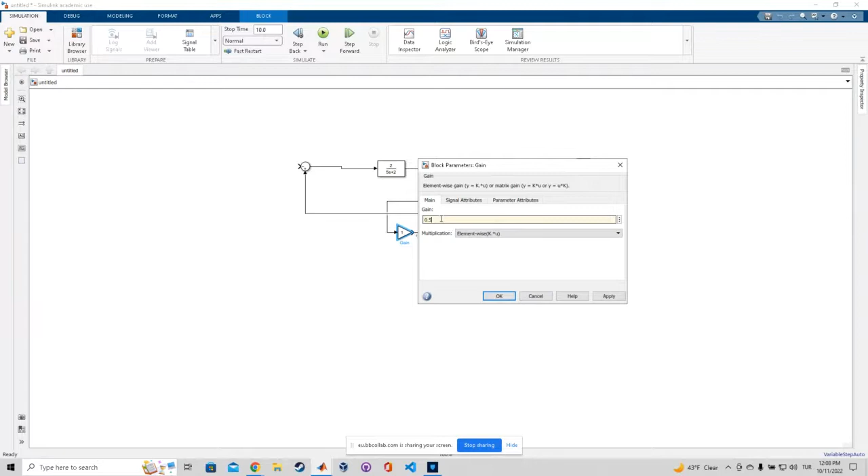You can change your transfer function numerator and denominator. And then gain, you can decide your gain value. Let's say it can be 1, 0.5 or 0.02. And here is division. You can change it like this. You can decide both can be division, both can be multiplication. It's up to you. It's up to your transfer function.

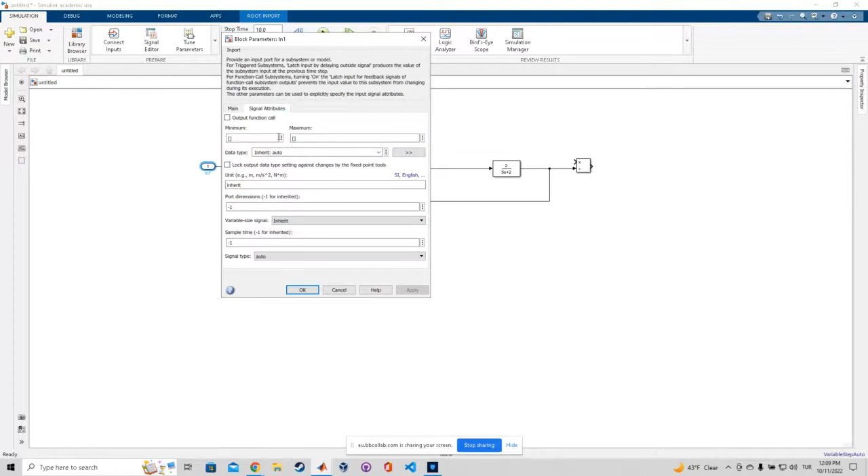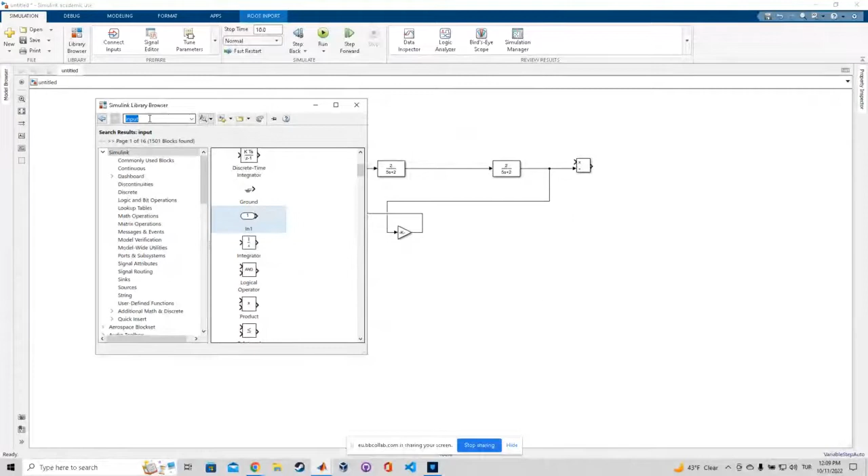And then here, let's say we need an input. Where's your input? All right, you get your input here. You can assign a variable to your input. When you double click it, you can see your block parameters here. And then there's a scope; for seeing the function, you need a scope. The scope will show you the wave, right? Let's say you connect your output to the scope.

And then here you need another input. You can just copy this, and then you can connect this too. See here, your transfer function, you assign your numerator and denominator, you can change it from here. You assign the gain here, your sum product here, you assign the inputs, and then you transfer it, and then you get the scope, right?

You can just hit run, and it will run your function. You can see the results here. Double click the scope. Yeah. Right, guys, so far so good.

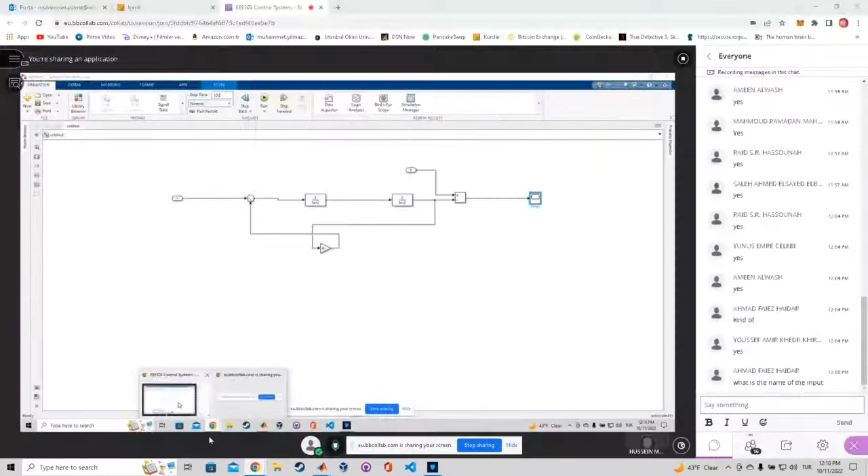Yes. Name of the input. You can change the name, right? Let's say, wherever your system is, it can be voltage. You decide it and assign it. You can change the name by double clicking here.

Let's say this one is actuator. This one is engine. It depends on your function. I mean the circle after the first input. Circle.

This one is a sum block. You get your input, you get your gain, and then you add it to the function. Here you can add your gain or not add it, right? Both can be minus, both can be plus. You can add both to the system.

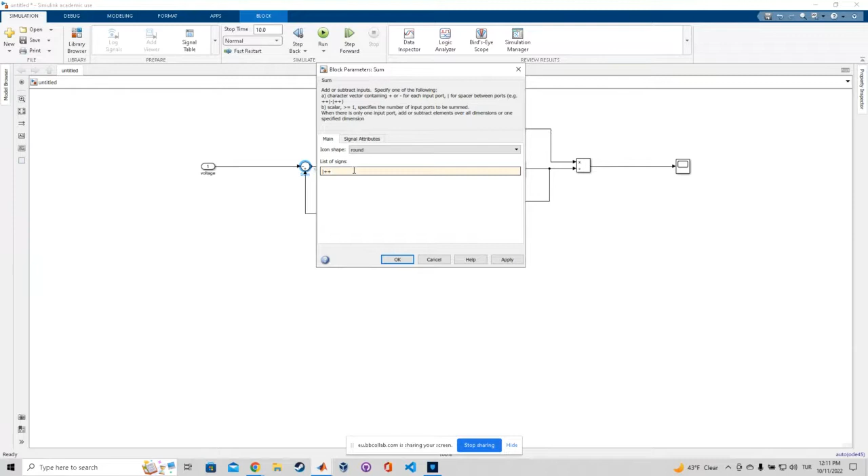All right, it's a sum product. You saw it in the lecture, right? Your function needs this to connect the transfer functions together. All right. Okay, guys, do you understand? Yes, hocam.

That's it for today. Next week we are going to start the experiment. This was just the introduction. You can look on the internet for Simulink. There's a lot of documentation about MATLAB, but the most important thing here is you can just hit the question mark here, right? You just click it and you can find

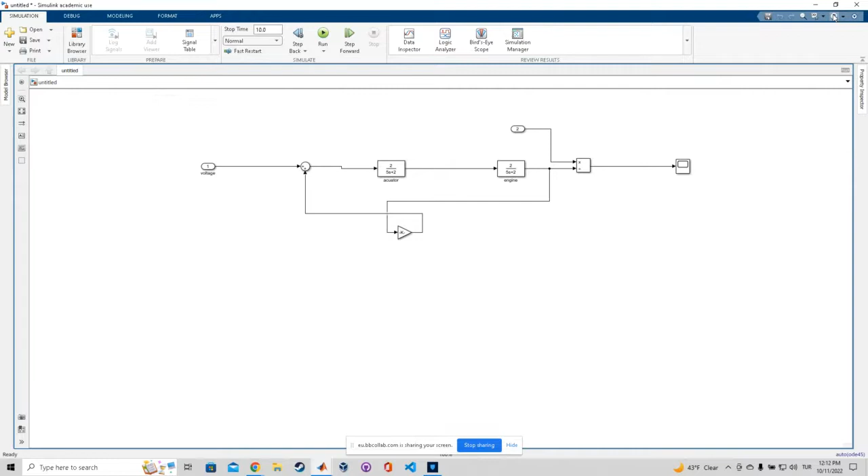documentation about any topic. MATLAB has awesome documentation. You can use it. This one right here is the most important one. Don't forget. You just hit it, it opens MATLAB documentation, and you can find every topic you want to work on.

So next week I'll see you guys and we start our lab. But don't forget transfer functions. We're going to start the lab, so take a look at the transfer function and the sum product.